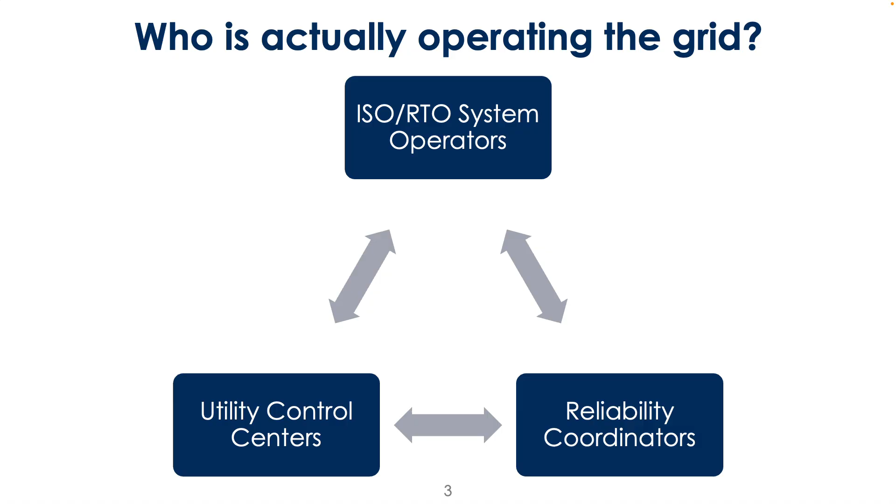Okay, and so remember, our main objective for the operators is balancing supply and demand continuously. Anytime I request electricity, some power plant needs to provide that electricity. The way we monitor the health of that balance is through frequency. That's the most clear signal for whether or not loads are being met by generation. Having too much or too little generation relative to the load can be dangerous, and we'll talk about this more specifically in a moment.

And remember all of the stuff the market does to schedule things. If the market or those forecasts are not getting things perfectly right, which would be very difficult, then you're always going to have a difference between what's scheduled and what you physically need on the system. So we're going to look at what it takes to deal with this perpetual difference between what's scheduled and what you actually need.

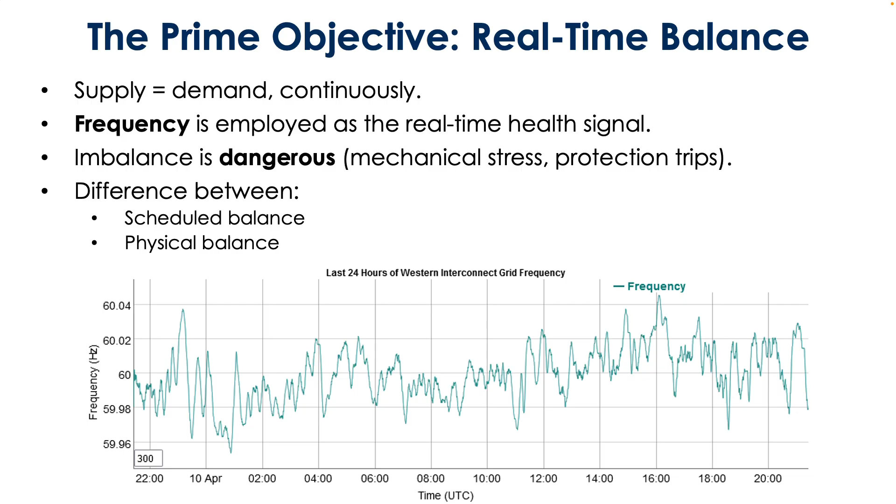But also note the units here. You're off by hundredths of a hertz on the y-axis. So these are the sort of deviations, and we'll talk about what happens when you get larger and larger deviations from our 60 hertz in the US. Okay? Any questions about this so far?

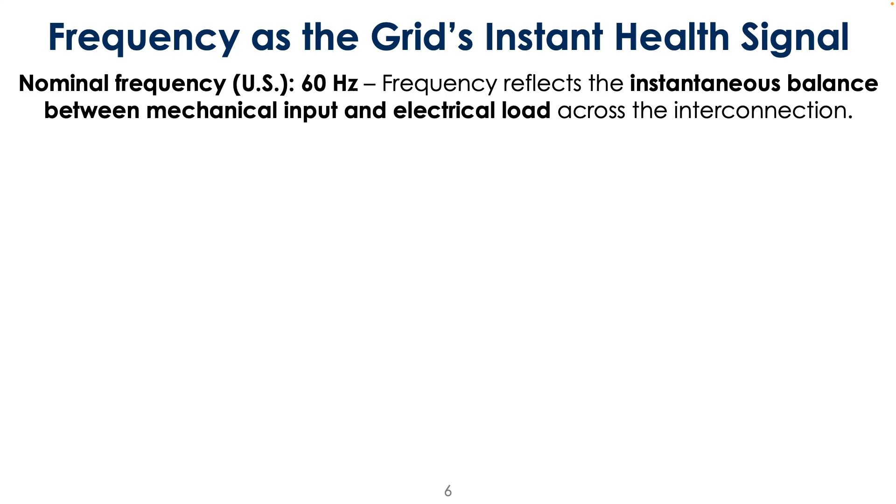All right. So frequency control: how do we maintain frequency? As I was just mentioning, nominal frequency in the US is 60 hertz. That's true in the WECC, the Eastern Interconnect, and ERCOT, but they're just not in sync. When your system is balanced, the mechanical power in the generators equals the electric power consumed by load, minus any losses in the system.

The rotational speed of any motor on the system is going to be constant and in sync with the grid. And balance means your frequency is holding at or very near 60 hertz. So that graph I just showed of a typical day would be a good indicator that our system is fairly balanced.

Okay, when we have too much generation, when your generation exceeds your load, frequency rises above 60 hertz. What happens is you have governors that will have turbines try to reduce input power as a way to reduce generation. And then there's something called AGC, which we'll talk about more in a moment. It's sending signals to reduce generation.

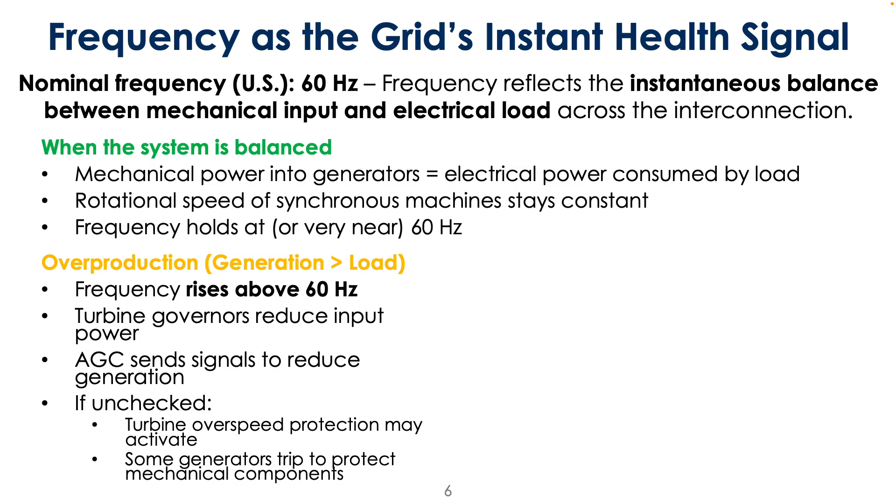If unchecked, certain protection devices may start to activate. Some generators might even trip to protect mechanical components, because remember, this stuff is spinning in sync with the grid. If frequency gets too high, it can spin too fast.

Okay, and then you have underproduction. This is when generation is under your required load. And what ends up happening is your load starts to try pulling energy from your generator rotors, and so the rotational speed is going to slow down. And so your frequency will start to fall below 60 hertz.

These governors that I was just mentioning will also help to try and increase mechanical input to start to get generation back up. And in response to underproduction, you may have things like reserves starting to deploy automatically, and in more severe cases, operators will try and step in and start to redispatch generators in an effort to prevent this from becoming a larger problem.

We generally consider underproduction to be maybe a little bit more problematic than overproduction. You can get cascading failures maybe a little bit more easily in this case.

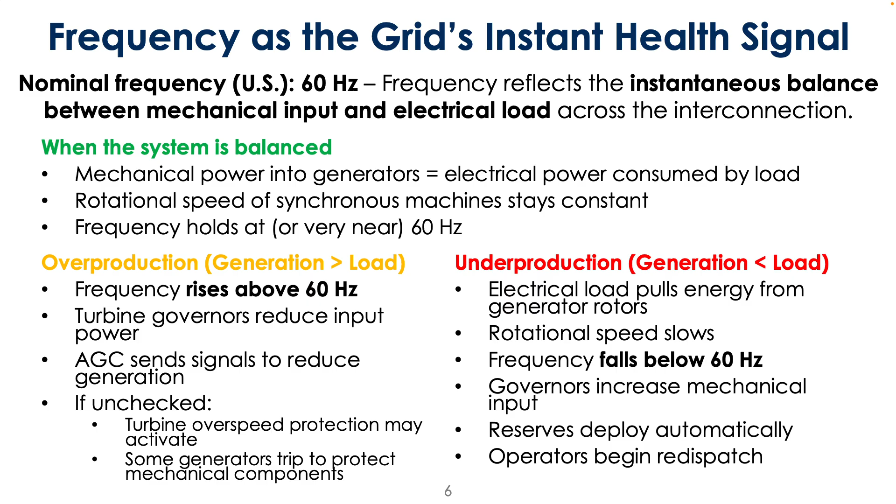So you can think of essentially extra load, or load that's not being satisfied, is trying to like pull harder on the electricity, which is causing this stuff to go out of sync physically. So that kind of like friction in the system is going to slow things down. Okay.

So cascading failure that I was just mentioning. So what can happen? So this is not to scale. This is the same plot as before, just using a plot to demonstrate scale here. So if you fall below 59.8 hertz, these governors, automatic processes that tell generators essentially to back down or start producing more, fully engage and tell the generator to try and produce more, since you are underproducing.

Your primary reserves start to respond, and then operators have a small amount of time to try and bring in that generation to stabilize the grid. And so if this was the typical day, and I'm saying 59.8, this is 59.98, 59.96, 59.8 is like way down here, okay, so the magnitude of this is quite different from what you would experience on a day-to-day basis.

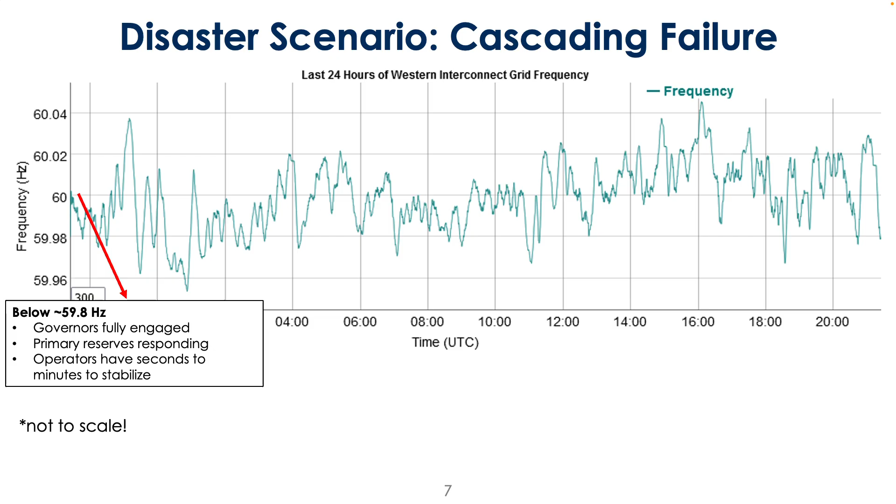59.5 hertz, this is when a lot of those protection systems will begin to go off. And so this is really meant to protect your generators and turbines physically from tearing themselves apart. So generators will trip. And then this is where it's bad enough that utilities may try and actually load shed.

So you get this cascading failure where the frequency will continue to drop as generators start tripping, and you produce even less power. And so one way to combat this is you turn off power to your customers, basically. So that's what load shedding is, yeah.

Is this plot an actual plot of cascade failure? No. I could not find a plot of, I mean, I'm sure there probably is, but this is more to give some sense of scale relative to what would be happening in cascading failure. So that's 60 hertz, 59.98, 59.96. If you're going below 59.5, you're way off the chart.

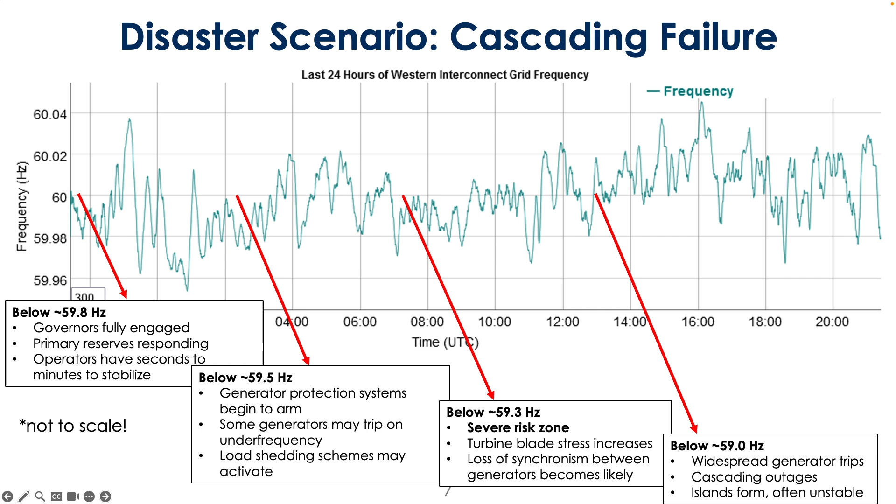So when does a cascade generally begin? Like if they can't stabilize it solely using the governors and then generators start to trip, that's a potential cascade? Yeah. 'Cause you have no chance, at least within seconds or minutes, of serving the load that's now going even more underserved. Yep. Exactly.

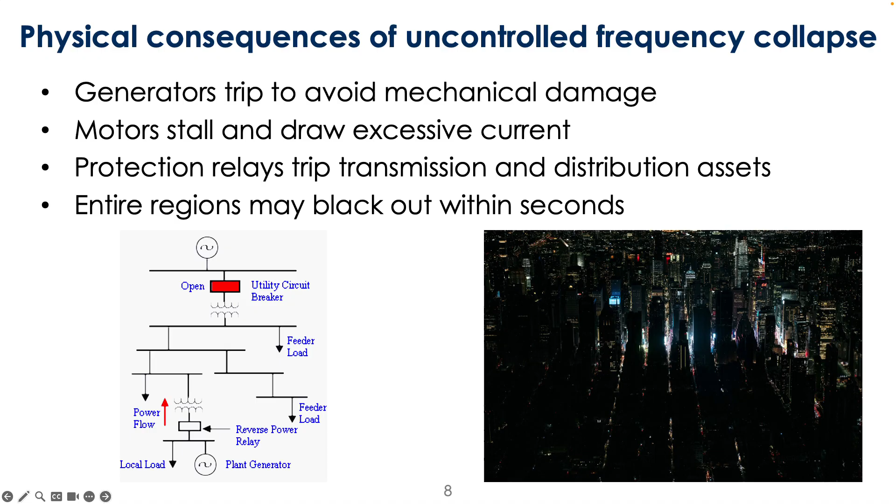Yeah, so this does what most of you guys would expect, right? Uncontrolled frequency collapse leads to the generators tripping, motors stall, try to draw excessive current. Protection relays will trip in your transmission and distribution systems, and then entire regions may black out. So this stuff is bad and something that you would hope to avoid as an operator. And so what things do we have to help control frequency?

So we can think of this in a couple of different layers. You have primary, secondary, and tertiary forms of protection. Primary things are happening fast and most often are very automatic types of protection. Going down to tertiary, things take longer, and this is where operators are actually stepping in to try and intervene.

So governors, inverters, these are devices that are coupled with your generation assets, for example, that will try and protect against frequency deviation. These things are automatically looking at the frequency on the grid and giving signals to your generator to ramp up a little bit or ramp down a little bit. Okay.

The AGC, this is the automatic generation control. Hold that thought; we're going to talk about that more in just a second. And then tertiary, your operators are essentially trying to dispatch reserves and even redispatch certain systems in order to deal with frequency control.

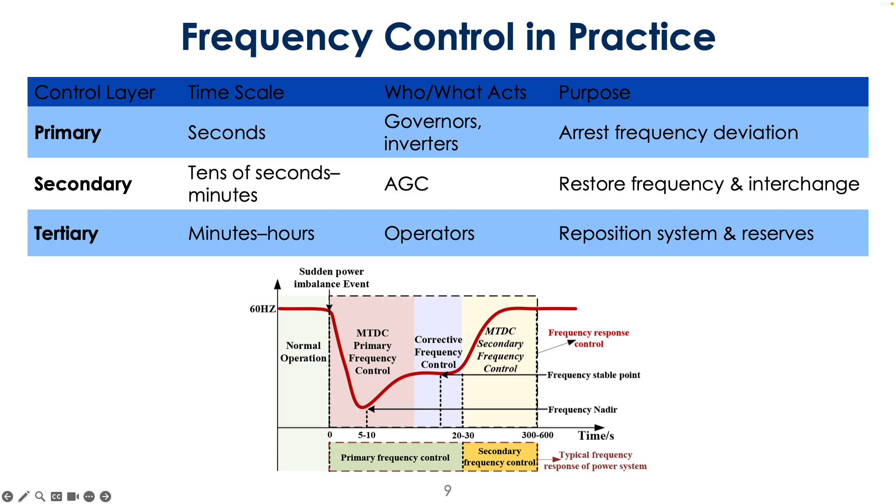Okay, so primary frequency response. Yeah, so the governors are the things that detect how the frequency is changing, and then they will try and proportionally increase or decrease, on the mechanical side, the generator and the turbine, essentially trying to proportionally increase or decrease the generation to make sure that you're staying balanced on the frequency side.

So this is all automatic, no operators need to do anything. This is constantly happening, right? These are the very minuscule deviations that you have in real time. And so the response happens very, very quickly, but the magnitude of the response is a little bit more limited relative to the other types of controls.

You also have inverter-based resources, and they can provide certain nuanced types of responses, even faster than governors, but even less in magnitude in terms of the energy provided.

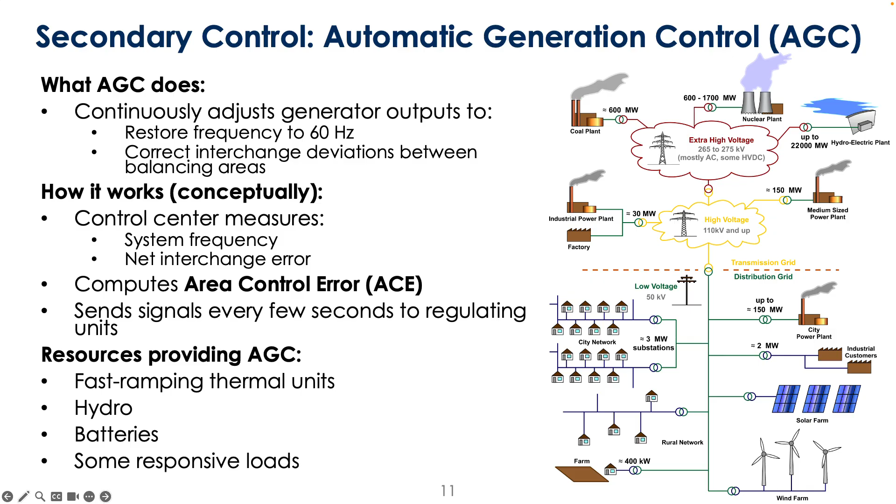Sure. I actually don't know. You can have many different sizes of interchanges, so AGCs are probably controlling systems of varying scales. But you're talking about multiple generators as opposed to a single turbine generator with a governor. So the AGC will help with persistent frequency deviation: if you're off by a little bit, scheduling errors in your tie lines, small continuous imbalances. If you think about the way we operate the market, you make a forecast and then true things up in real time. With all that scheduling, you may still not be perfectly matching, persistently slightly off, and the AGC is able to handle these types of things.

Once you've more severely mismatched the generation and load, that's when you get into tertiary control, where you need operators to redispatch things. Larger contingencies, transmission overloads, fuel supply failures, prolonged shortages: these cause much larger deviations than the AGC can handle.

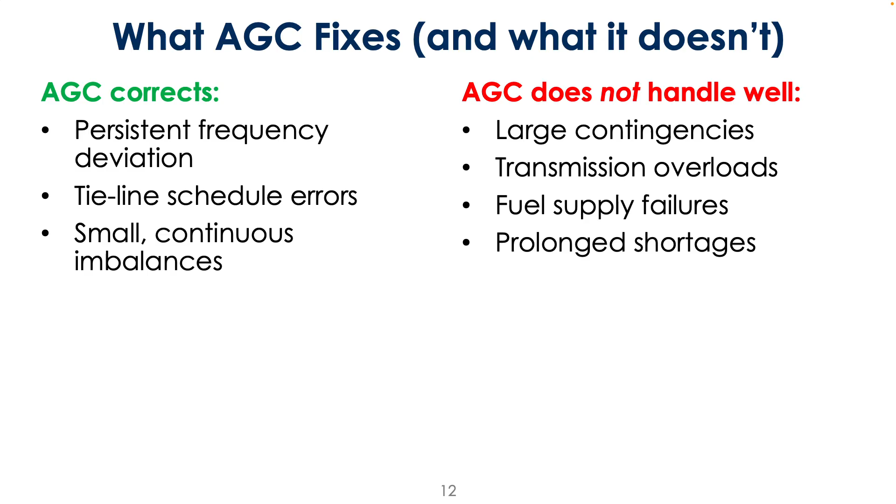It's run by CAISO. Okay. You could probably have something that's owned by someone else, but CAISO's able to dispatch it. Right. Maybe. I don't know who would want to actually bother owning an AGC. I don't know how you would make money necessarily, but it could be kind of just a per-time expense, like, hey, we will remain available for this daily fee. Yeah, interesting. I've never thought about that. But okay, run by CAISO. There you have it.

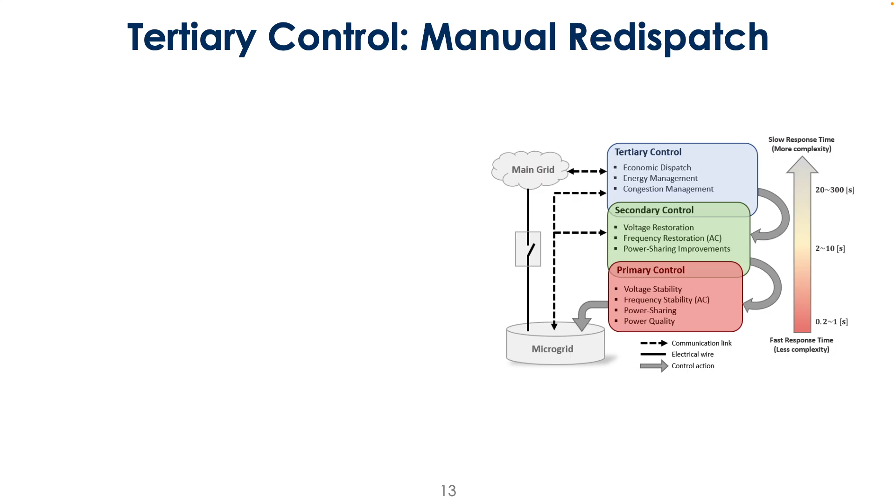Okay, and then our tertiary control, sort of manual redispatch, right? So the operator directs changes directly to generation. So they say, these generators and these reserves essentially have to turn on or turn off. And so this is what's happening in the timeframes after your primary and secondary responses are stabilizing the system.

And so if you perpetually have frequency deviations even after your primary and secondary controls are stepping in, this is when you need manual control. The primary and secondary are essentially buying time for you to be able to do this type of thing. So committing additional generators or decommitting units if you're overproducing. You might be dispatching reserves in a specific way geographically. You might be calling on demand response, and you could actually be adjusting some of your scheduling. Okay, any questions?

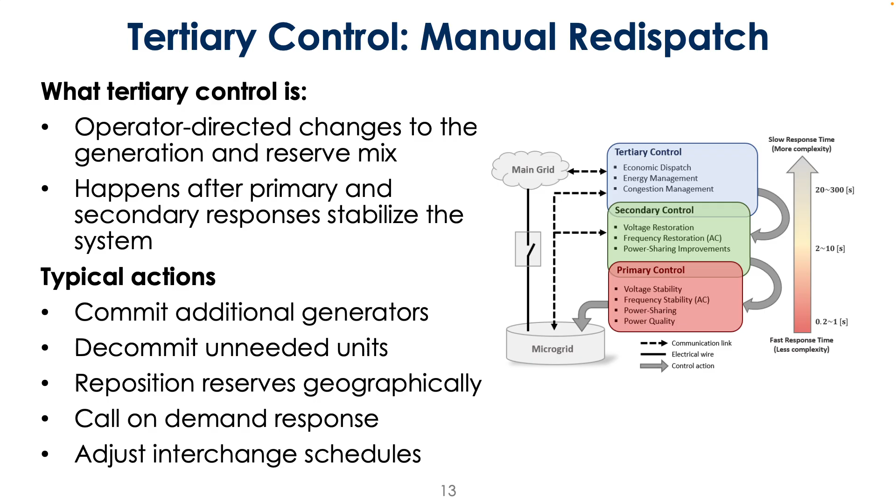Okay, so what are operators actually watching? They're looking at things like system frequency, right? This is one of our strongest signals for the health of the electricity grid. The area control error, which is what the AGCs are looking at. Reserve deployment levels: as you think about any of these contingencies happening and you might be using reserves, you're actually required to have some amount of reserves to deal with this. And if you're starting to eat into your reserve units coming online, you need to prepare for that as a contingency and see what you can do to alleviate the use of those reserves.

You're looking at generator availability and ramp rates. Say everything is going totally fine, everything's kind of peachy, your frequency is within the bands that are totally acceptable, but you're using up all of your generators, all the stuff that ramps quickly is being used up. There you have some alarm bells going off, because if something were to happen, your ability to respond to a larger scale issue is diminished, right? So the reserves and your generator availability and ramp rates speak to that capability.

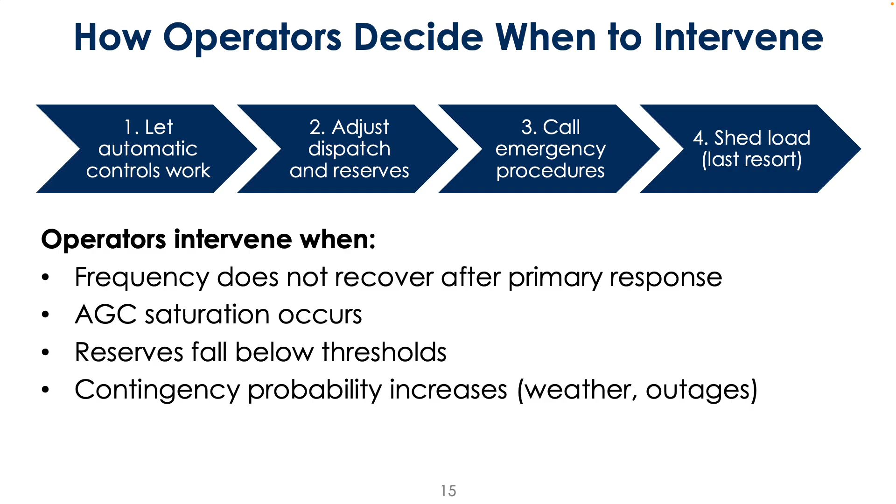So, ancillary services. So what are these? Whereas we think about the wholesale market and the assets that provide electricity as a way to supply the energy, ancillary services are tools that are meant to keep the grid stable, as opposed to just thinking about bulk supply meeting demand. So markets schedule energy. These services provide certain capabilities, right? To respond quickly, to absorb uncertainty, and to survive contingencies.

So we think of a broad set of categories of ancillary services: regulation, spinning reserves, non-spinning reserves, supplemental replacement reserves, and then voltage and reactive power. So regulation, this is the continuous fine tuning. So these are things like the governors. Then spinning reserves happen in slightly longer time scales, non-spinning reserves in even longer time scales, and then supplemental and replacement reserves, even longer than that.

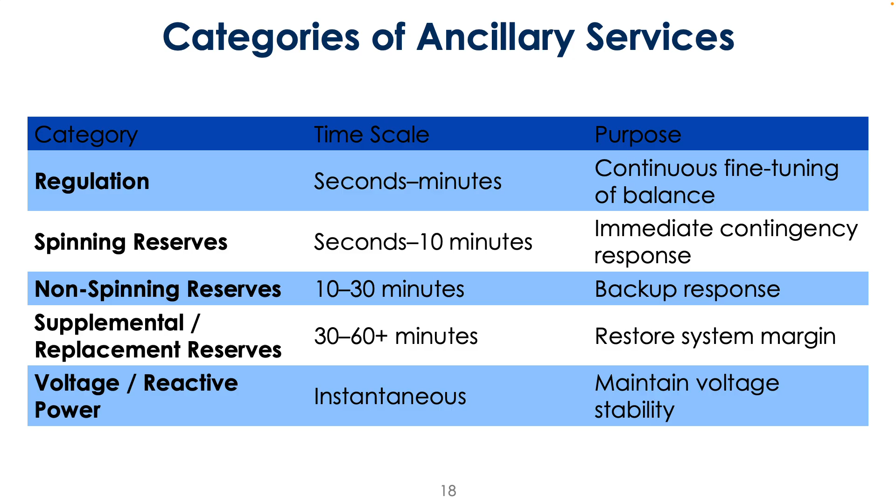Okay, so regulation services correct these continuous mismatches. So these would be your, why am I blanking on it? The governors and the AGCs. This is all fast response. So this is the stuff that we've talked about, right?

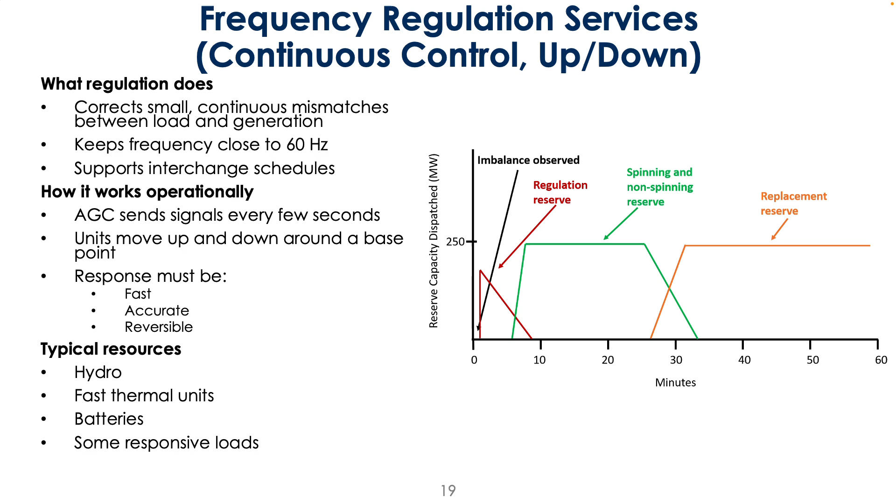And spinning reserves. So these are resources that are synchronized with the grid. They're basically able to increase output immediately, as opposed to something that needs to turn on, spin up, and sync up with the grid frequency. So these things typically will respond very quickly. And this can help arrest frequency decline after a big event happens.

Question. So spinning reserves are just not generating power, but they're being spun already? Yes, and actually, from a services perspective, you get paid to essentially just sit there and be a backup. Even though you're not contributing electricity in the normal market, you get paid to be a spinning reserve whether or not you end up providing electricity. So there's an entirely separate market for a lot of these ancillary services, providing incentive for services meant to provide reliability as opposed to supply.

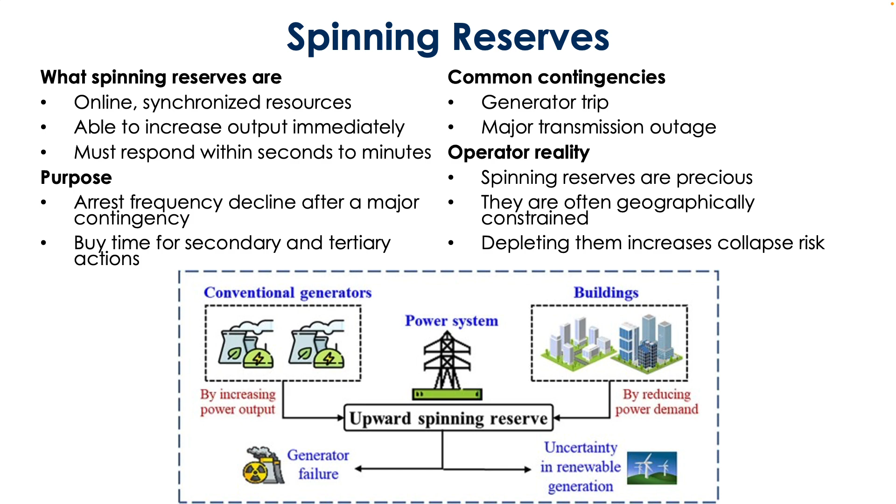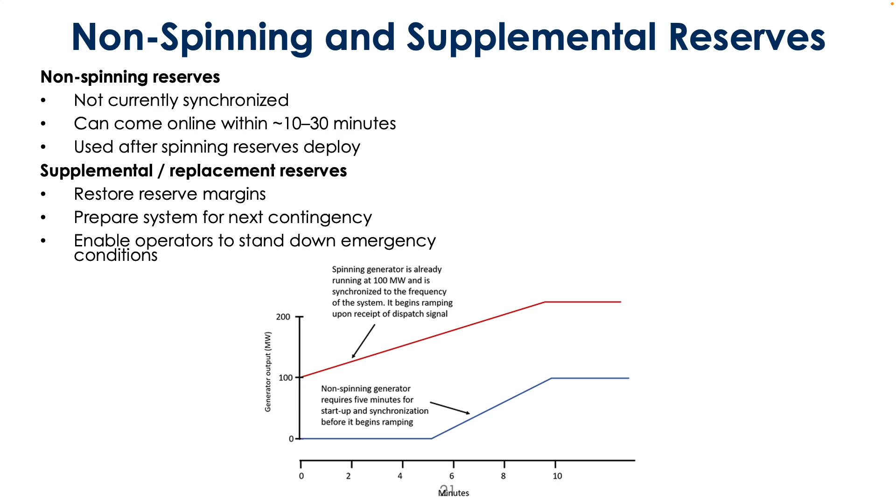And then the even slower non-spinning reserves are things that are not synchronized. They have to come online, sync up with the grid. This takes even longer. And so you're often using the spinning reserves to buy time to turn this stuff on, which might buy you even more time, or it might actually in itself be enough. So supplemental replacement reserves, these are helping restore your reserve margins for the next event that might be happening.

Yeah, so the types of resources that we might consider to be non-spinning reserves are gas turbines that are not currently online, demand response programs, importing electricity from out of your balancing area, and then some slower moving storage.

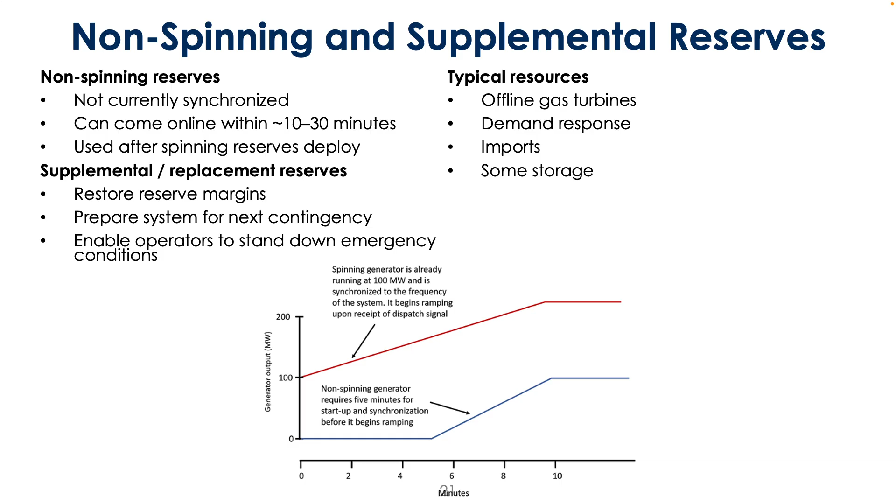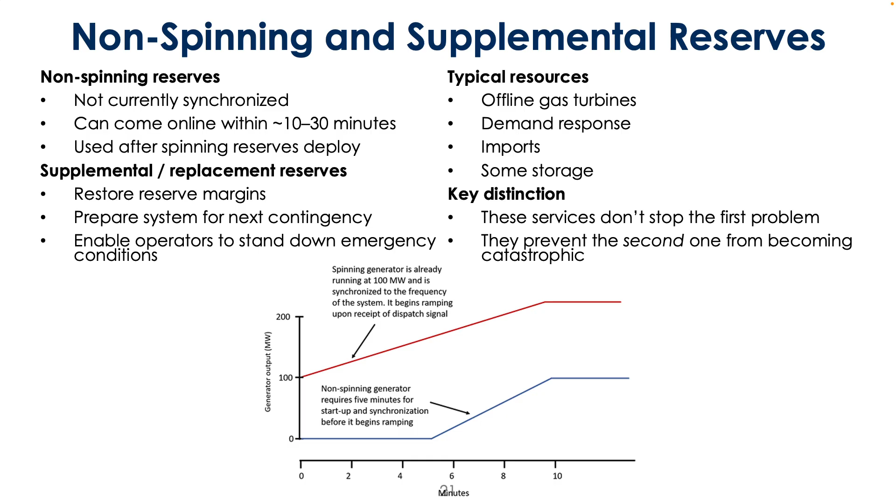Yeah, so I think the trend, right, is the amount of deviation that each of these services can deal with is smallest for the fastest things, and they're almost these chained together systems that help you buy time so that you're essentially leaning on systems that will eventually be able to deal with that particular sort of contingency event. Okay.

So the last thing that I'm gonna mention here, we've mainly been focusing on frequency, but not all of the reliability problems have to do with frequency. And so things like voltage support and reactive power. Reactive power is going to help support your voltage stability and transmission loading capability, and it can affect your generator and motor operation. So if you guys remember, we actually talked about this during the field trip, right? So for reactive power, there are mechanisms to help deal with this often at the local level. So at the substation, that was the bank of capacitors, right, that helped to deal with this particular issue.

Reactive power is like the initial spike needed when a motor comes on, for instance. Well, it's tied to that, but reactive power, oh, we're gonna get into this again. This was that whole analogy about, it's connected to essentially the electricity being able to do work, right? And so there's the real power and then the reactive power, which is kind of this, yeah. It's the VARs, volt... I would look at it as a triangle. Yeah, there's a geometric, well, you were the one who gave the geometric example, right? It's a circle. Yeah, how does it go again? How are you describing it? I'm trying to remember.

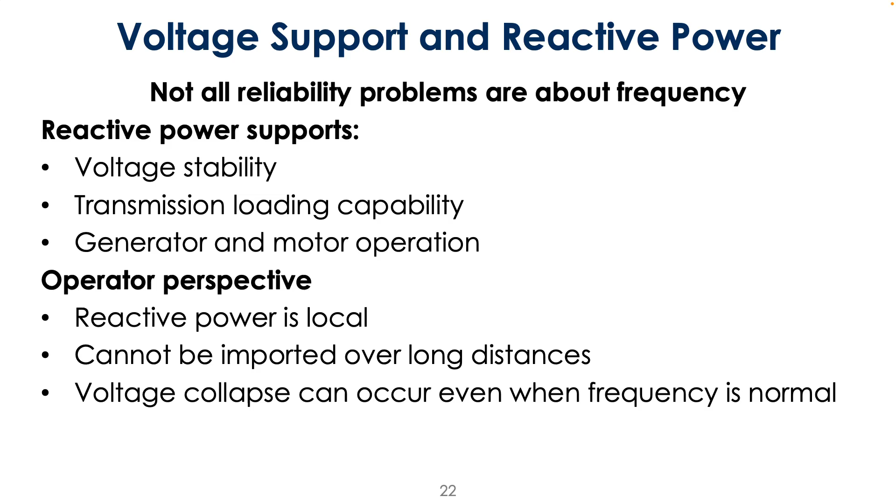I did not study electrical. Check out the power triangle. If you Google the power triangle, there's a lot of YouTube videos on it. Yes. Maybe I'll try and find a good resource that explains it well, because I don't think I can explain it very well. But okay, let's press on here. One more slide, and then we're going to take a break.

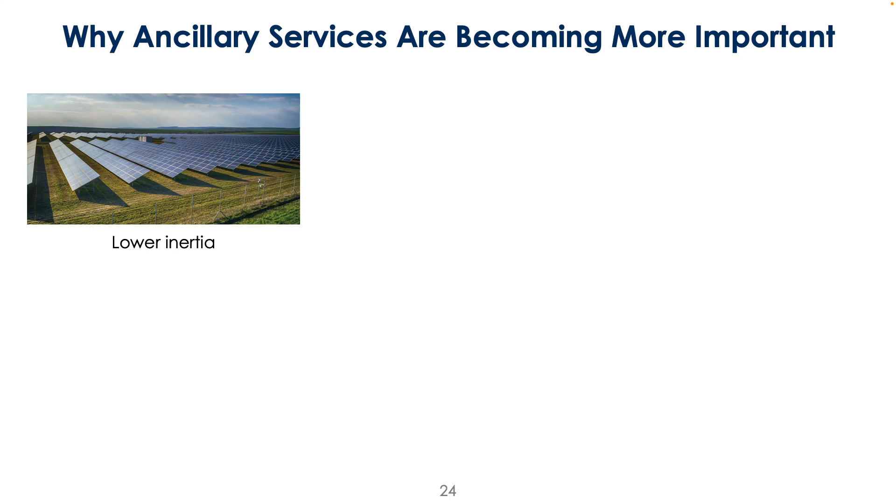So the last slide on ancillary services, and why these are becoming more important. We have a lot more solar, right? So there's less physical inertia in the grid because you're no longer spinning a physical turbine and generator. That also corresponds to higher forecast errors, simply because a greater proportion of our power generation is vulnerable to things like weather, and the variance of our forecasts about weather impacts increases as you have more of this resource.

We've talked about the duck curve, right? This is leading to a lot faster ramping. Ramping resources are being depleted. We have a bunch of flexible generation, and you use up more of that to deal with duck curve ramping, so you're reducing the flexible assets that you have as a backup. Larger contingency sizes, as you have a lot more build out of transmission. We'll talk more about this in a moment.

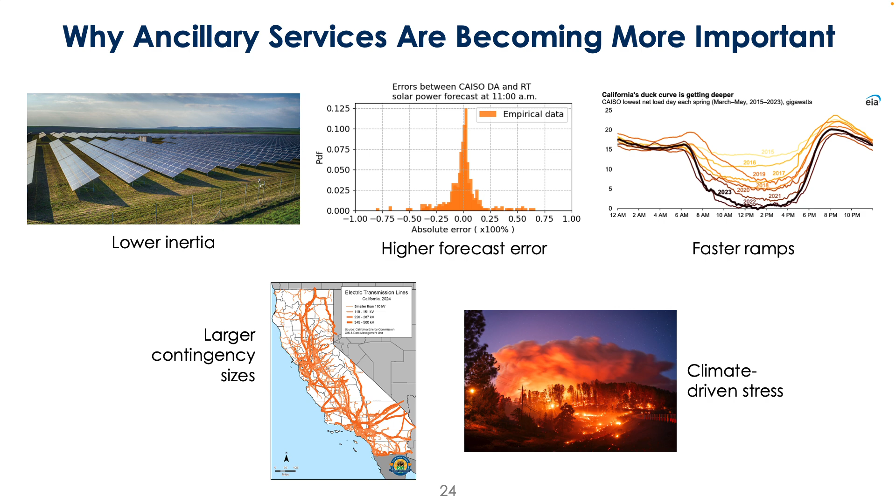Okay, so let's take a quick break here. Let's do 4 minutes and then we will press on. Yeah, that totally makes sense. I'll be right back.

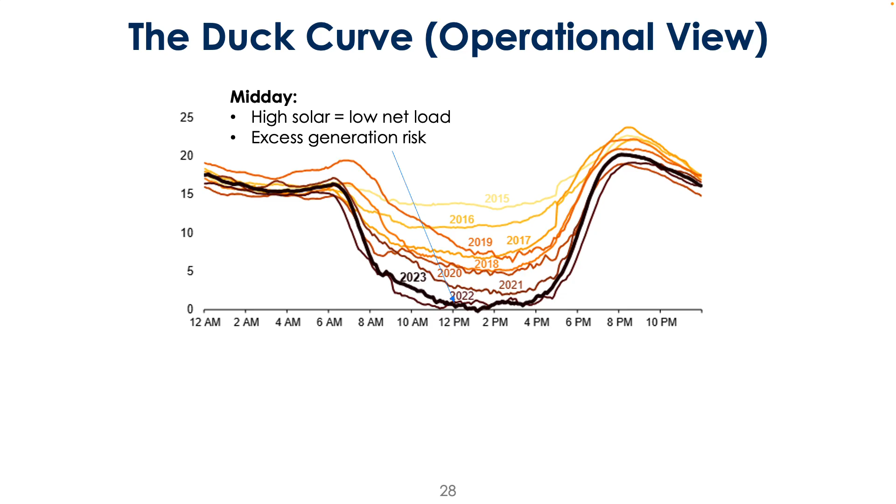Okay, so duck curve, operational view, right? Midday, high solar, low net load, excess generation risk. In the evening, your solar drops very quickly, your load remains high, and the net load ramps very quickly. And so a challenge for the operator is being able to have enough of that fast moving resource ahead of time, right? Suppose, for example, that this stuff is all the lowest cost stuff, and you've decided to dispatch that first, despite knowing that you have a really fast ramp coming up ahead. That's a bad operator decision in the sense that yes, you might be economically dispatching in those times, but you're going to run into big trouble once you're not able to deal with those fast ramps.

And so that's actually one of the reasons why you might have slightly non-economic dispatch happening in certain times if you want to value flexible resources to hold back and be able to provide services when you need them. Yeah, and so you want to preserve this upward ramp capability in these evening times. Oops, sorry, keep clicking around here.

Wouldn't a flexible resource bid higher knowing that we would call? Yeah, so in reality, there are strategies for some of the ways that they bid, but oftentimes the operator knows a lot of this ahead of time, and the main thing is on the reserve margins. They keep enough of the flexible stuff paid as a service that you might not necessarily need to be trying to do valuations of that, since it's baked implicitly into a separate market.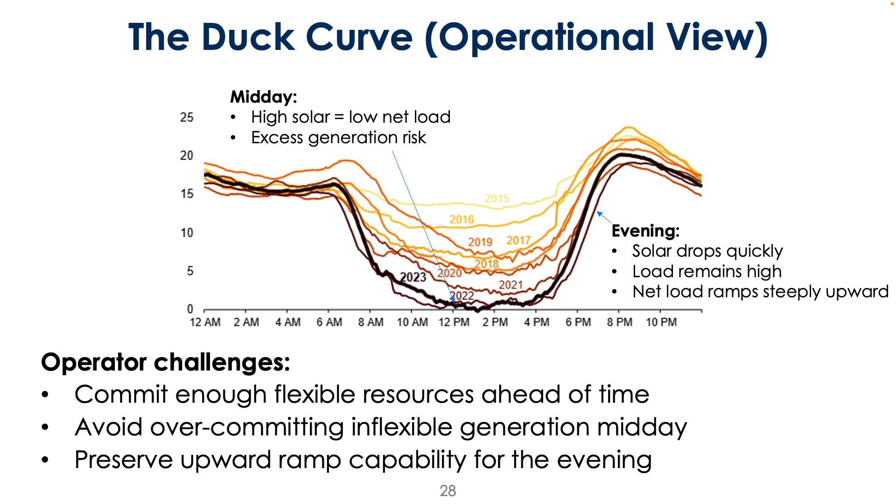And then forecast error. So the operator's uncertainty. This is actually a real forecast from CAISO, where you had a particular day that was very spotty with clouds. They do a lot of their forecasts with these auto-regression models, and they tend to perform poorly when you have things like this happening. So very sensitive to weather, behavioral effects, cloud cover, wind ramping. Spatial correlation is a common one that you can get wrong when a lot of plants in a particular area get affected by something. Time dependence.

If you have day ahead error, there's commitment risk, right, where you've chosen a path that's dispatching or not dispatching sets of generators in a way that will compound your error. And then in smaller timescales, you might run into the issue of running out of reserves if you're leveraging those assets already. And then in real time, the main error that we've been talking about is with frequency. What's meant by behavioral effects? Is that just how people use? Yeah, suddenly everyone decided to use AC for some reason that you didn't anticipate. Something like that, right? Yeah.

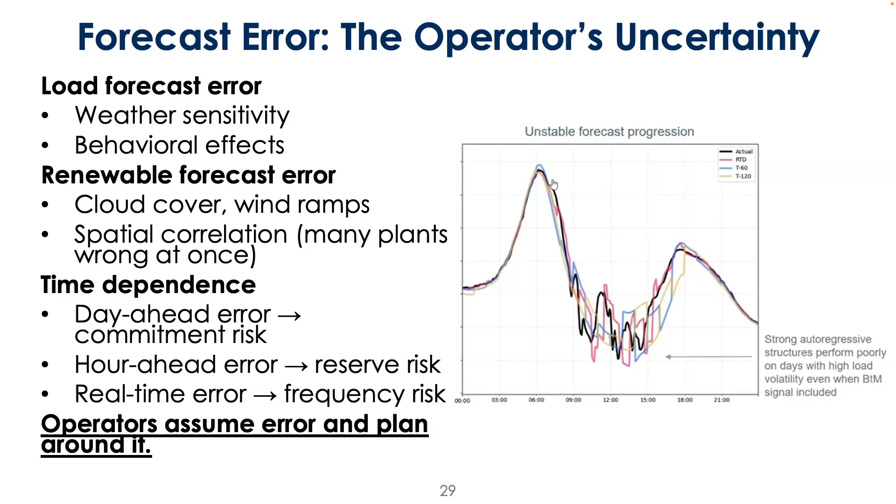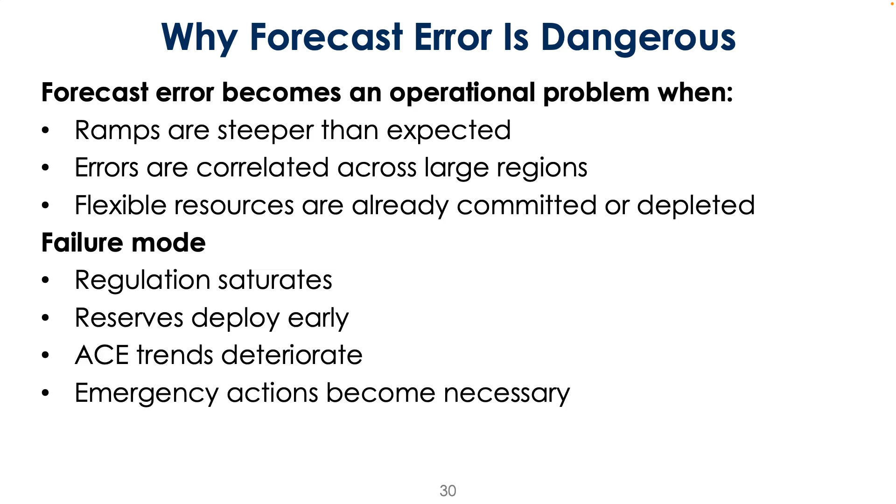And so forecast error, I think this is kind of intuitive, right? Why can this be a problem? Ramps can be steeper than expected, errors that are correlated, flexible resources are already committed or depleted, if you're getting things wrong perpetually. So you have all these different failure modes. These are the same things that we've been talking about throughout. And so managing this is an important aspect of the operator's job.

They are not only operating reserves for supply, but reserves of ramping resources. They might be committing flexible units early to deal with certain contingencies, even if it's not economic to do so. Other things happening more these days is using storage to absorb excess generation and provide quick ramping capabilities. You might even be curtailing renewables strategically when you have constraints in your flexibility, and then repositioning assets geographically.

Can you elaborate a little bit on ramping reserves? Yeah. So, when I've talked about reserves in the past, think about California, for example. Let's say we anticipate there's 30 gigawatts of demand peak on a certain day. That means from a supply perspective, the operator needs to hold back some percentage of generation as reserve, as backup in case the demand is higher than anticipated. We always have backup to work with. That's not the only type of reserve. That kind of reserve we think of as capacity reserve.

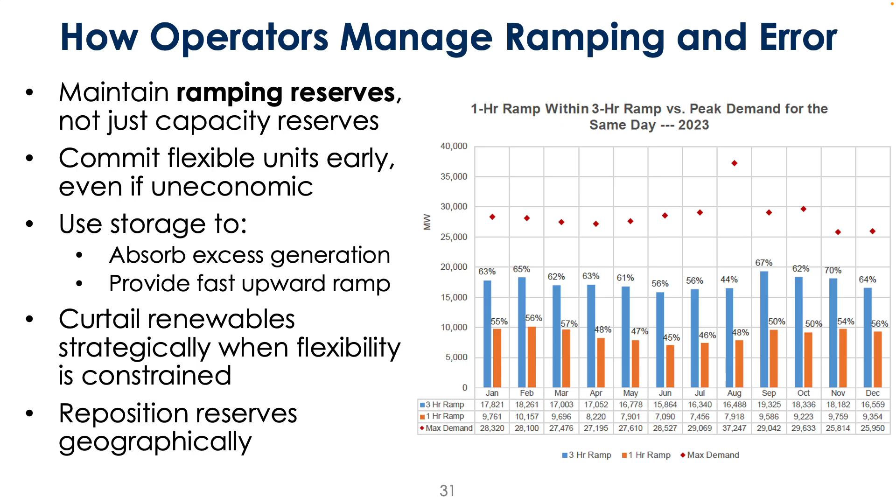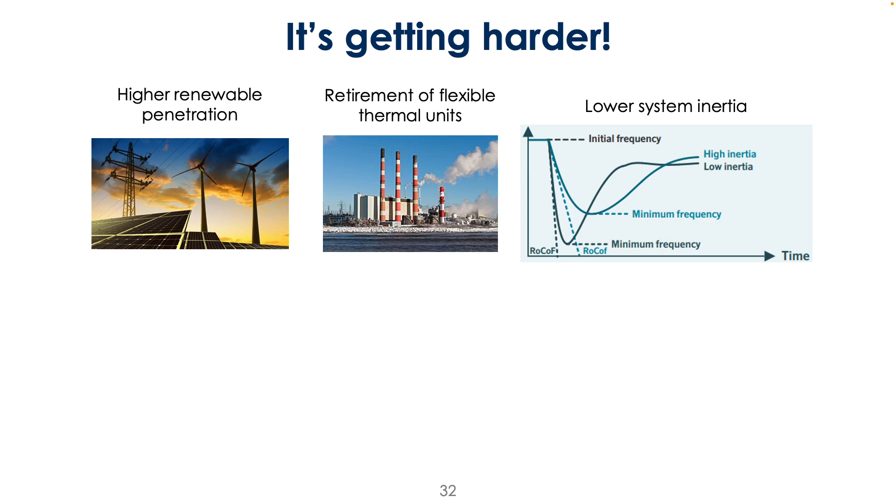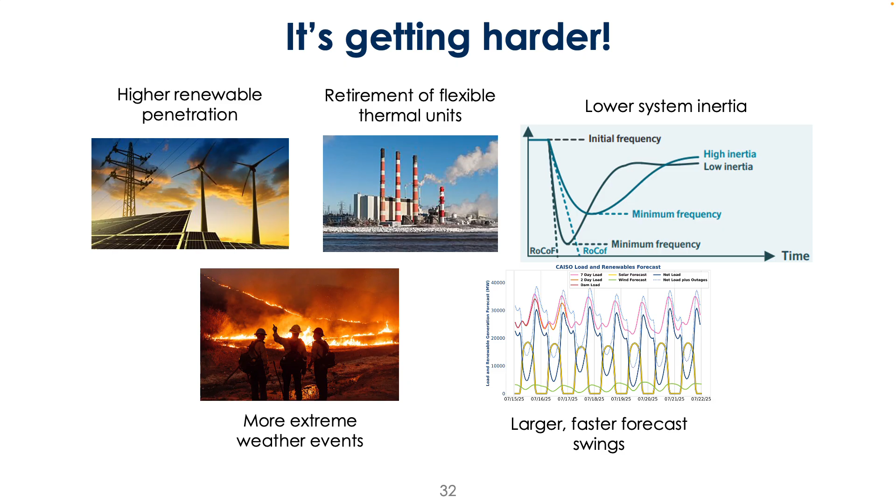Yeah, dealing with this stuff is also getting harder. Higher renewable penetration, retirement of more flexible thermal units, the lower system inertia that I was mentioning before, more extreme weather events, a lot of the same type of issues we were talking about for why ancillary services are important. These are the same reasons why forecasts are harder and ramping is more important. All right.

So we have talked about different markets before, right? Day ahead and real time. And so now I want to talk about how these things relate to one another, and what is the reality of that planning and scheduling situation, right? So the day-ahead markets produce plans, not outcomes. And then the real-time markets are really about adapting to any mistakes that you've made in the day-ahead market.

And so all of this forecast error stuff and issues that we're talking about, the system operator is built and designed to try and deal with that, right? We know that the day-ahead markets and the schedules are imperfect, and so the real-time markets are the ones that step in to help correct those errors, deal with the uncertainties, and deal with the contingencies. And us having these real-time markets is really the operators literally assuming that the day-ahead schedule is going to be wrong. And the question is how wrong and where.

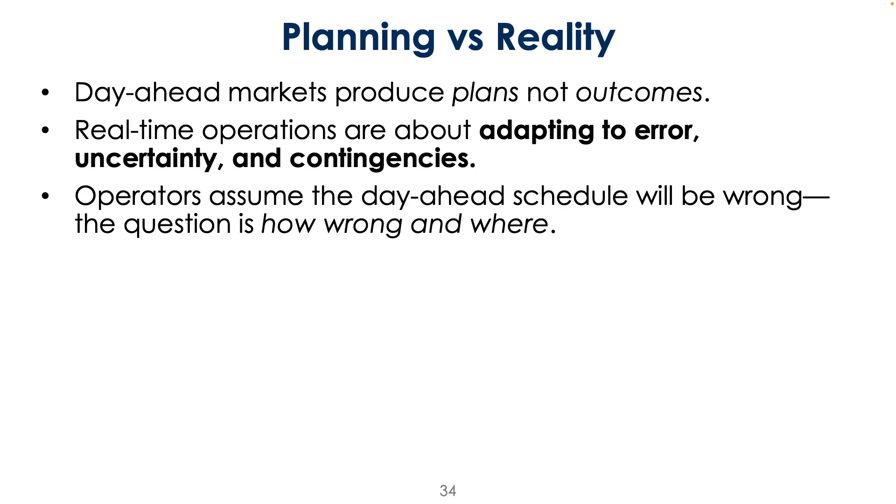Right, so we've talked about the day-ahead market and what it's designed to do, right? So we want to predict what load looks like the next day and then commit enough resources to meet those loads. And you're doing this in a very strategic way, right, to ensure that you have enough ramping capability and reserves to meet those loads. You are able to tell what your transmission constraints are going to be, and you're doing this in such a way that you can minimize costs, right? And so the system operator runs these big optimization models to figure out what the schedule should look like in the day-ahead market to do all of this.

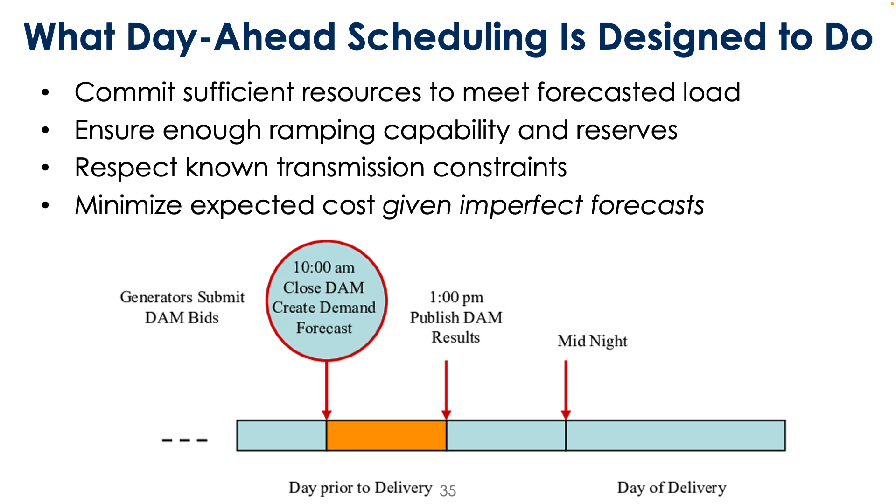Once you're in the real-time market, there's a totally different set of priorities, right? So day-ahead market, we want to get things running as efficiently as possible, low cost as possible, make sure all of our reserve requirements and transmission constraints are met. Once you're in the real-time market, you are not thinking about cost minimization. You're thinking about control and security. You go from thinking about schedules to what's physically feasible, and you go from optimization to thinking about limiting damage.

And so there's a few different things that you're looking at in the real time that might be a little bit different than what you might be looking at in the day ahead. So frequency reserves, transmission loading, voltages, contingency readiness, all of these things you're keeping an eye out on.

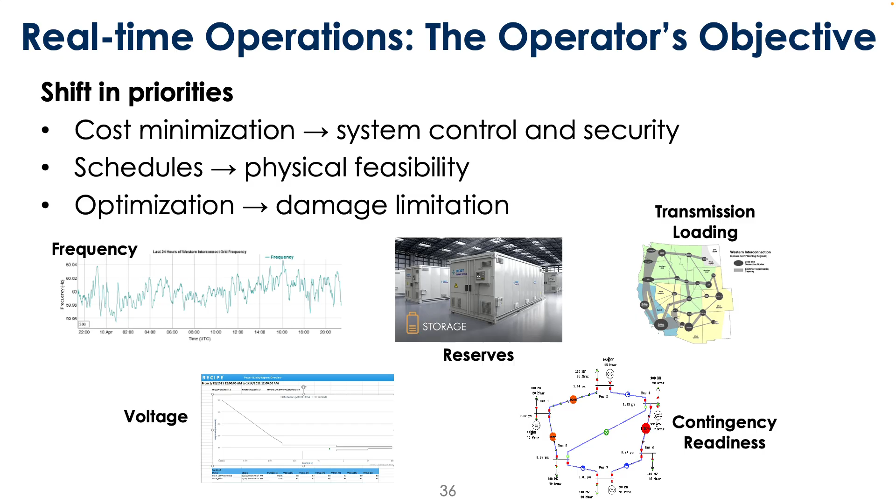Okay, so actions that the operators are taking in the real-time market: redispatching generators up and down, right? That's like the tertiary control we were talking about, overriding market outcomes, committing fast start units, curtailing generation, repositioning reserves, and then calling demand response. So these are the same tools that we've been mentioning, and now we're thinking about it in the context of the real-time market. So I want to do a quick walkthrough of this.

Yeah, sorry? Can we go back? Sure. You keep reading through these as if we're able to type as fast as you can talk, and that's just not it. I'm not sure what is important enough to listen to and let breeze through, and what's important enough to actually take notes on. Okay. This stuff is kind of a repeat of a lot of what we've been talking about, so I'm breezing through a little faster here.

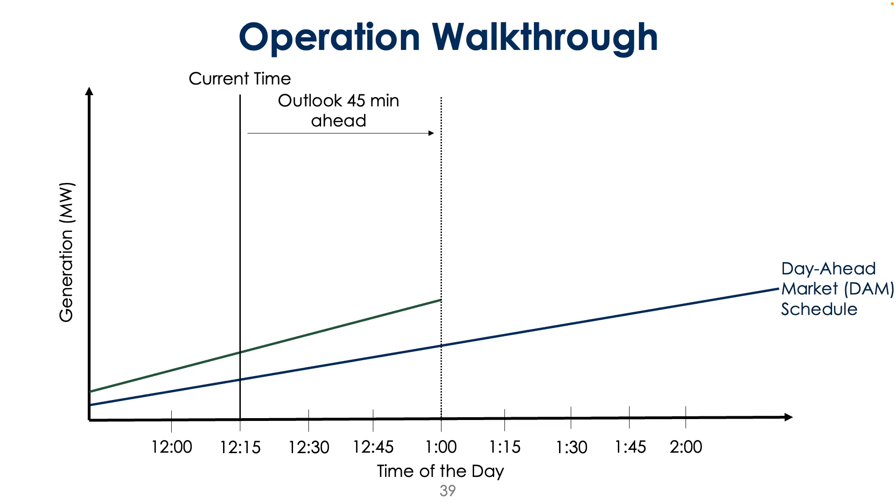And the first one that happens is known as the hour ahead scheduling process, or the HASP. This is part of the sort of broader real-time market. So 45 minutes ahead of the hour, they are going to make adjustments to my day ahead schedule, okay? And so in the HASP, basically, I look at my previous day ahead schedule, and I say, oh, actually, it looks like the load is a little bit higher than I anticipated.

Let me adjust my schedule so that I'm actually going to dispatch generators slightly different than what I was saying to do in the day ahead market. So we consider this type of hour ahead sort of adjustment to my generator dispatch, yeah.

How do operators kind of forecast load for the next day? Like, what do they use to forecast that? We actually have talked a lot with CAISO about this. On the day ahead market, there's a lot of data that goes into it, like historical data that helps to feed out what your forecasts look like. But the prime model that builds the forecast is like an auto regression thing. So it looks at the load from the previous day and a number of input conditions like weather and temperature.

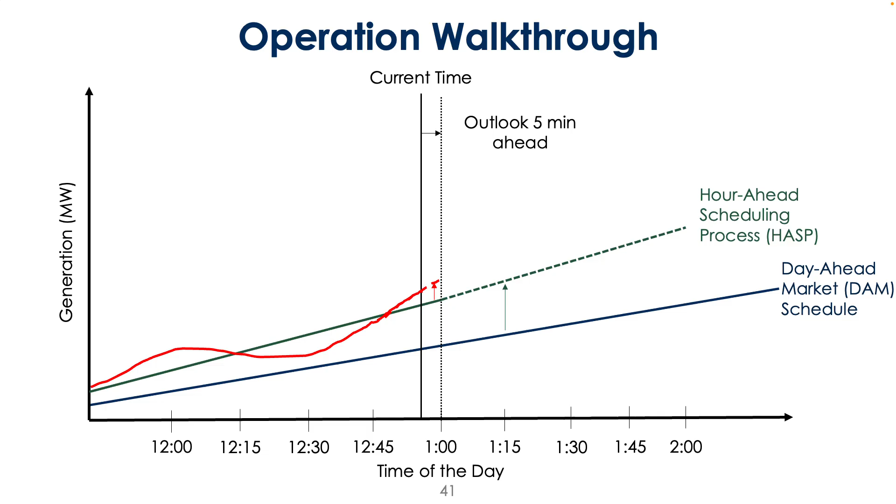Okay, and now we get even closer to current time. We're now 5 minutes ahead. And now you have something known as RTD, real-time dispatch, and that may provide even a further sort of correction. And so the idea here is that I've layered in multiple chances to kind of update to real-time conditions.

Yeah. So what's the difference from a generator's perspective between RTUC and RTD? Yeah, so why do we have a 15-minute and a 5-minute? There are some things that you can update in 15 minutes that could be more capable to ramp up in a shorter amount of time. Generally speaking, the less window of time that you have to respond to something, the more expensive it is.

So, why do we even have the real-time markets, right? If this was correct, this is like the most cost-efficient thing that you could do. This green arrow is a correction that you've made in the hour ahead, which is more expensive. And then you had to make another adjustment in the RTUC, which is even more expensive. And then you've had to make this last adjustment, which on the margin is going to be even more expensive.

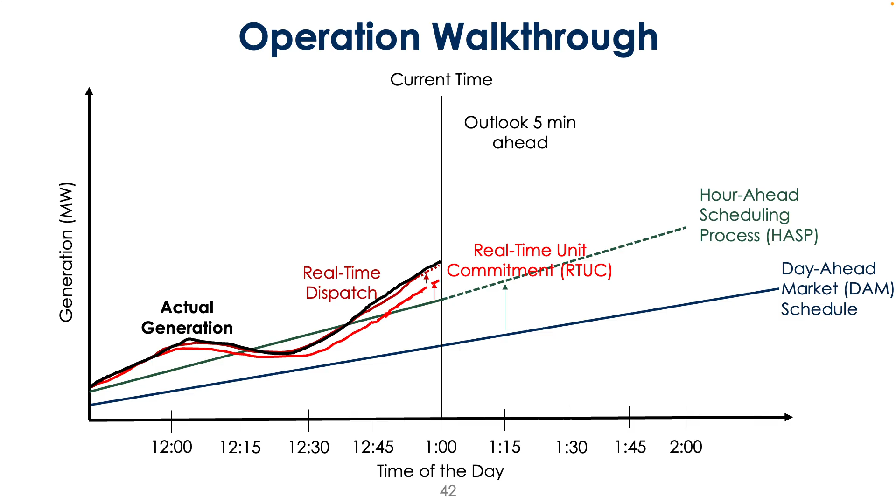Yeah, so the idea that you can follow the load is operationally achieved through our real-time RTUC and RTDs. And then your actual generation might look something like this. It's going to be very close to your real-time dispatch, and then the small deviations might be covered by the frequency stuff that we were talking about with the AGC. So the residual imbalances, the very small differences between actual generation and RTD, are going to get corrected sort of automatically because you're close enough that you're not going to run into frequency issues.

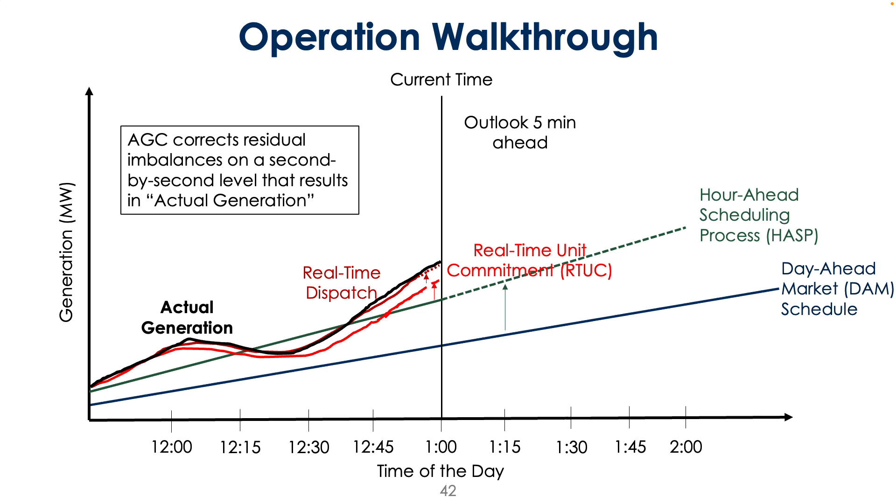Okay, and so the formal way of describing this concept that we were just talking about: what is the economic penalty of our forecast errors? Real-time markets are more expensive than day-ahead markets. That's why we try to make sure that the forecast errors are small, and that's why we have a day-ahead market instead of just running everything in real time.

And where does that cost come from? You were mentioning that it is the generator operating inefficiently, and that is definitely one source. But actually the biggest one is marginal unit changes between the day-ahead market and the real-time market. So if there is a difference between your day-ahead and real-time, had you seen that difference ahead of time, you would have dispatched a particular generator that could have handled that. But in the real time, you can't dispatch that because it's not ramping fast enough, or there are other constraints related to it. So the biggest cost difference is mainly from different generators having to meet the demand between your day-ahead market and your real-time market.

Inefficient commitment would be the second one. This is the one that you were mentioning: having to do startup and minimum run costs, ramping scarcity, reserve depletion. And then there's out of market actions: having to manually do commitments, things that have to run due to reliability reasons, emergency dispatch.